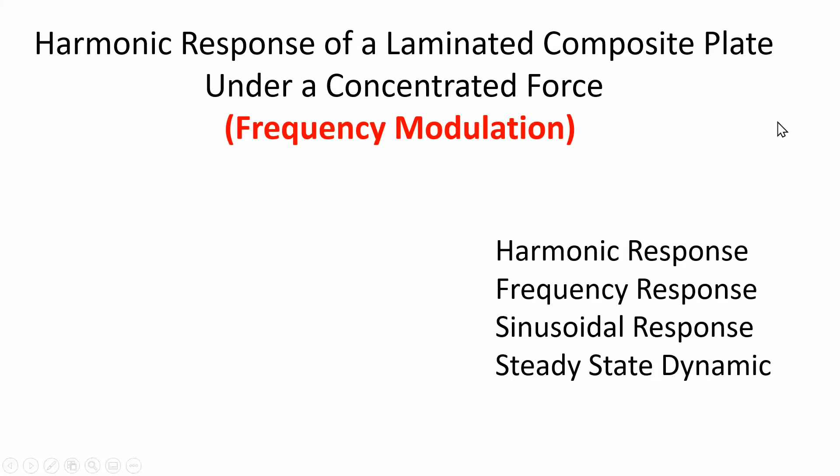We're going to apply our problem or the loading to a geometry of this type: a symmetric laminate plus or minus 45 degrees, with dimensions given in a minute. It is symmetrically located about that reference axis.

The source of a problem like that is, for example, if you took a table fan or a rotating machine, could be a pump or a compressor, etc., and put it at the middle of this plate. We know that due to imperfections in manufacturing, there is probably an imbalance with this rotating machine or fan, and as it turns, it causes a centrifugal force, which is applied at the center in an up and down direction.

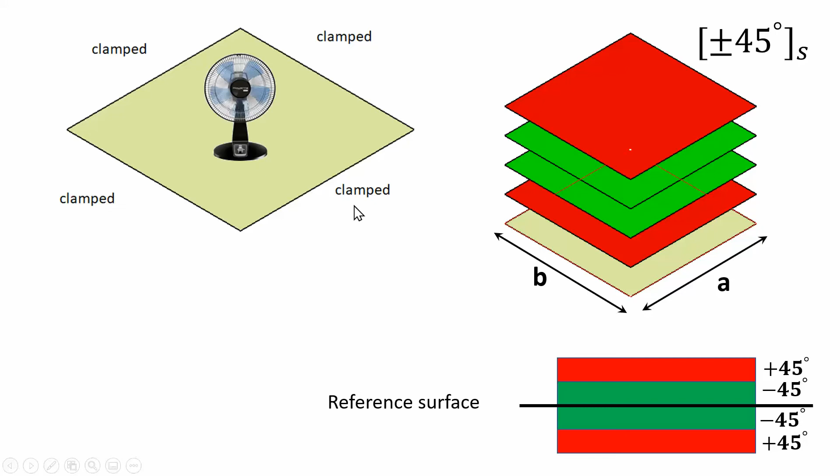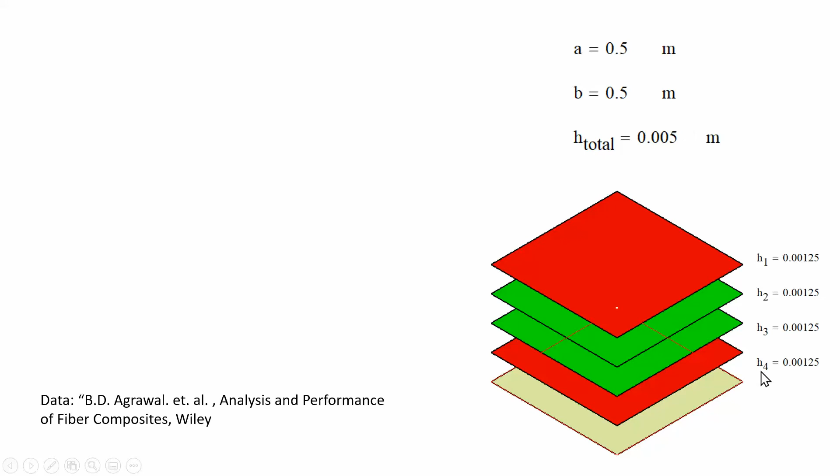By the way, I've drawn my rosette along with the global coordinate system to make it easier to see. This geometry and the data I'm using are taken from that book, and in fact I did a video segment on applying a static load to this problem. The geometry is a 50 centimeter by 50 centimeter composite plate, with four layers and a total thickness of 5 millimeters, and the properties are given here. I also need the density because it's a dynamic problem, so we put it there.

In general, this amplitude can depend on frequency. If it's like the previous video segment, it was constant, and for a constant amplitude, irrespective of frequency, we can use a white noise modulation type like we discussed in the earlier one. But if it depends on omega, on the frequency, then we have to provide CATIA with our own modulation, in the form of an Excel spreadsheet or a text file.

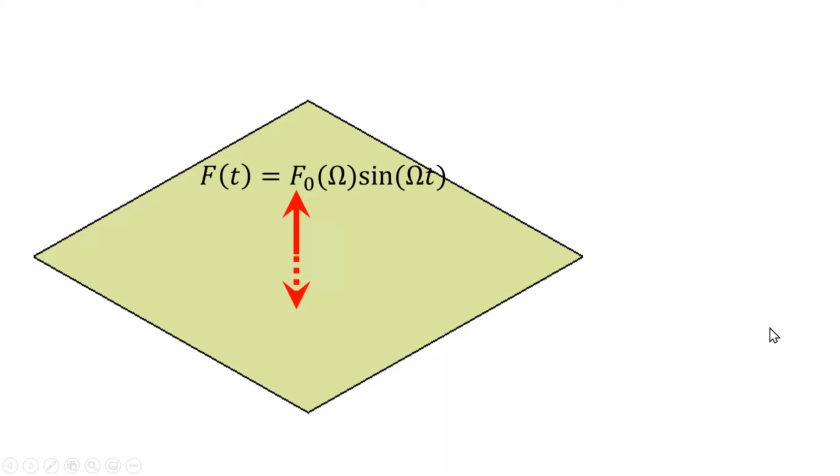So here's my fan. I'm going to be investigating the rotation of this fan, the RPM, or actually converted to hertz, between 100 hertz and 300 hertz. This may not be a realistic range, it's close to it, but anyway, we'll consider that.

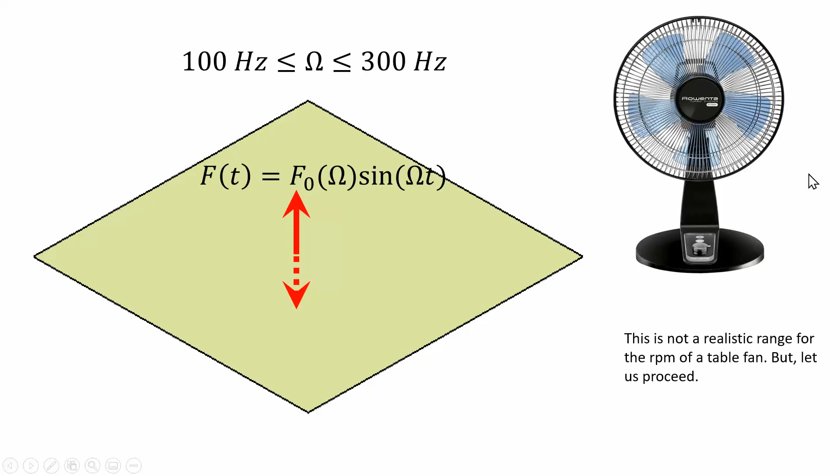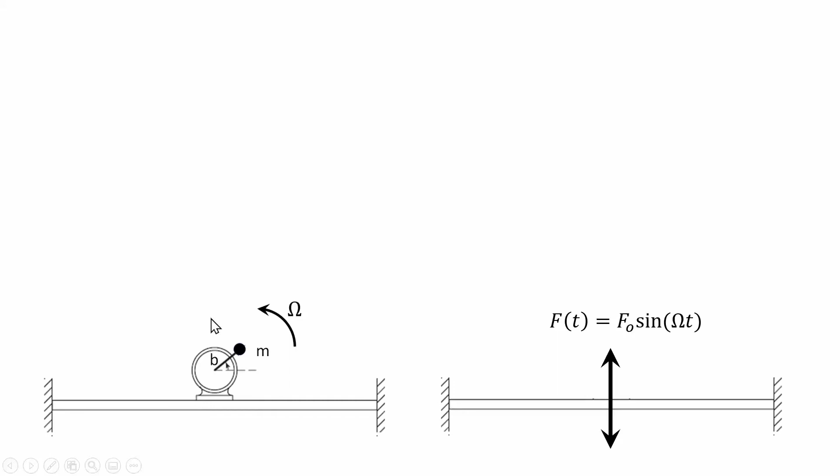In your vibrations course, you may have seen this in the context of a diagram like that: a rotating machine up there which has a mass imbalance placed at a distance, which can be assumed to be B units away from the rotation center. As it turns, it creates a centrifugal force, and that causes this thing to vibrate up or down. It can also go sideways, but vibration up and down is the critical one.

The magnitude of that concentrated force is actually mass times r omega squared, with r being b here, so mb. The mb I'm going to use assumes a 10 gram mass at a distance of 2 centimeters away from the center of rotation. If you do mb omega squared, converting to hertz where omega is 2 pi f, and taking the 2 pi out, it comes to 0.0079 f squared, where f is the frequency in hertz. I'm going to use this number, ignoring the f squared, as the applied load in the static situation.

And then we remember that when you do these dynamic problems, you have to do the static case.

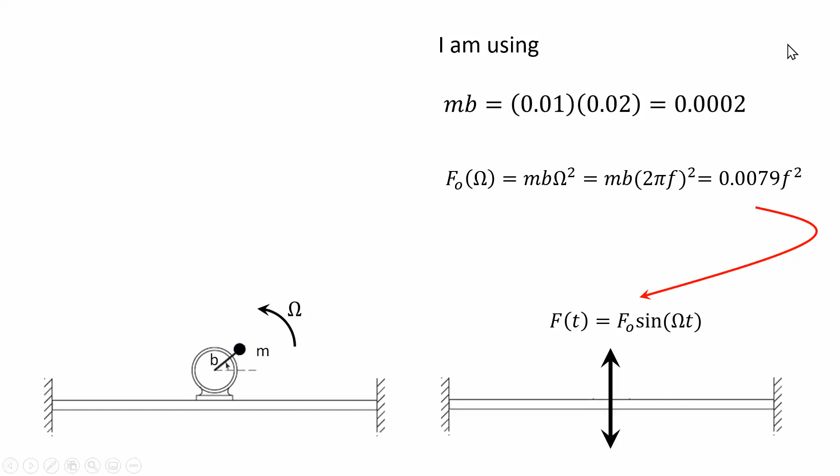I have done it by doing static first and then inserting or extracting frequencies of vibration, natural modes of the structure, and then we insert dynamic, harmonic, transient dynamic analysis. Which we're going to do. So the way my modulation is going to be is a curve like that. This is an Excel spreadsheet I'm going to prepare.

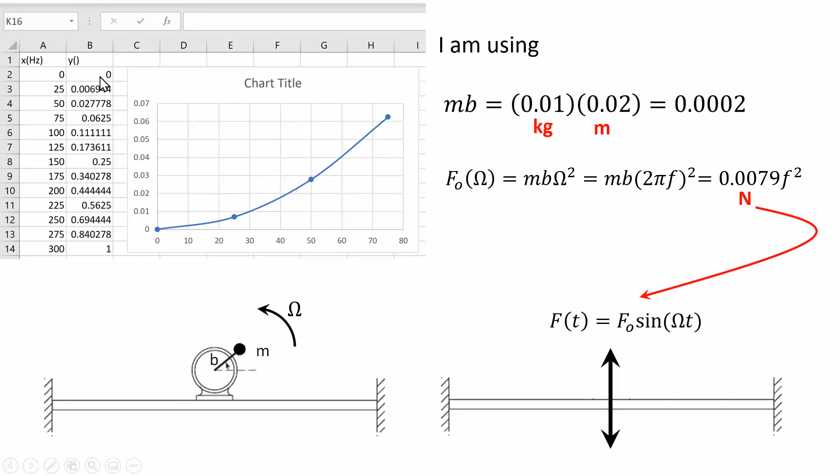Although I have it already, I'm going to prepare it from scratch for you. So it goes between 0 and 300 hertz, and somehow stops there. And the height goes from 0 to magnitude of 1, or amplitude of 1.

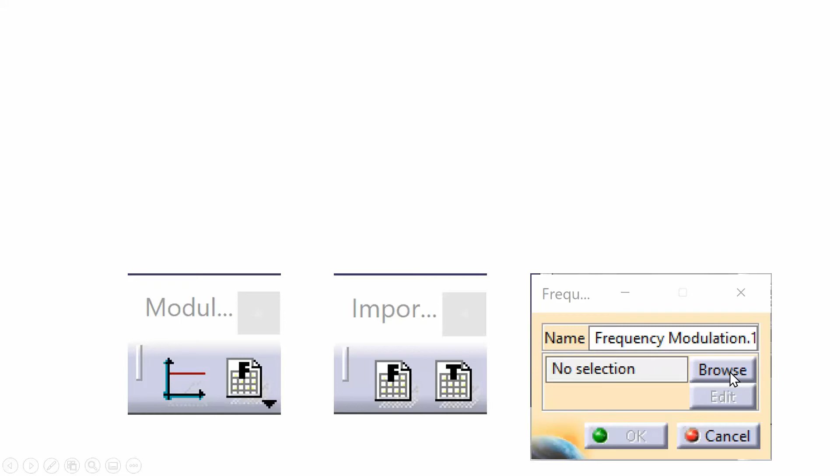This is how you do that when you have to import frequency modulation. You go to the modulation toolbar, make sure you select the frequency icon here, and then it asks you to go and get your Excel spreadsheet. Now this is the modulation curve that I'm going to be creating, goes from 0 to 300, and height goes from 0 to 1.

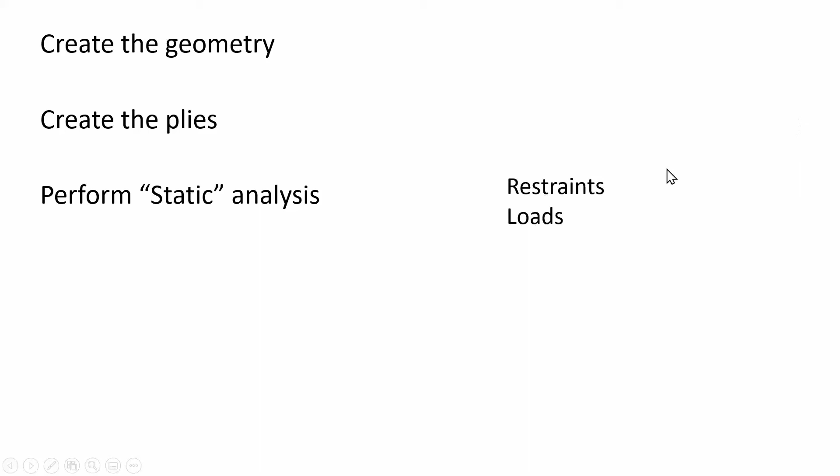Now let me remind you what the steps are. You create the geometry, you create the plies, you do a static analysis. When doing static analysis, you put restraints on the edges of the plate and apply load at the center, and you run it. Then you insert a frequency case, and that will extract the natural frequencies of the structure based on the restraints that you put in there.

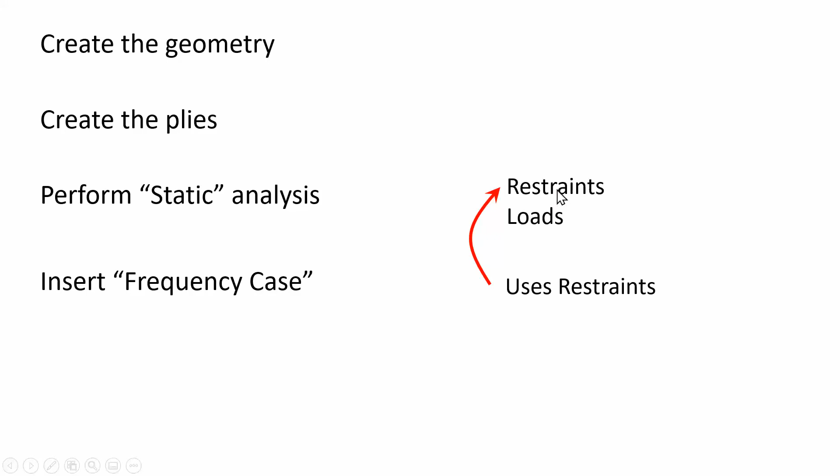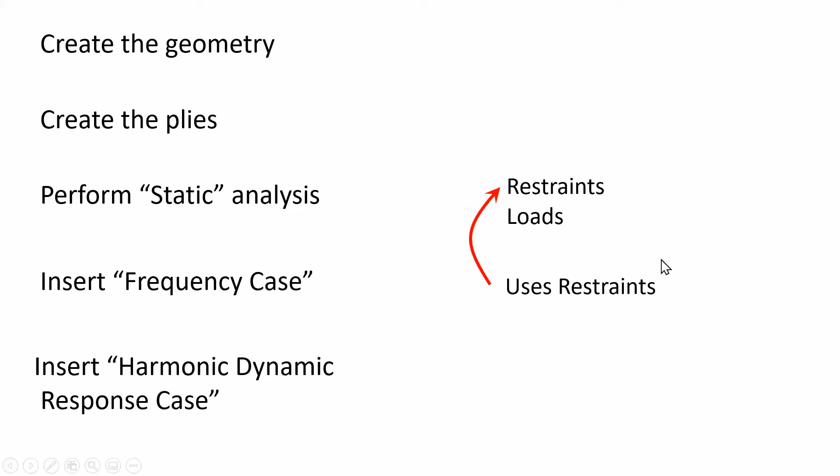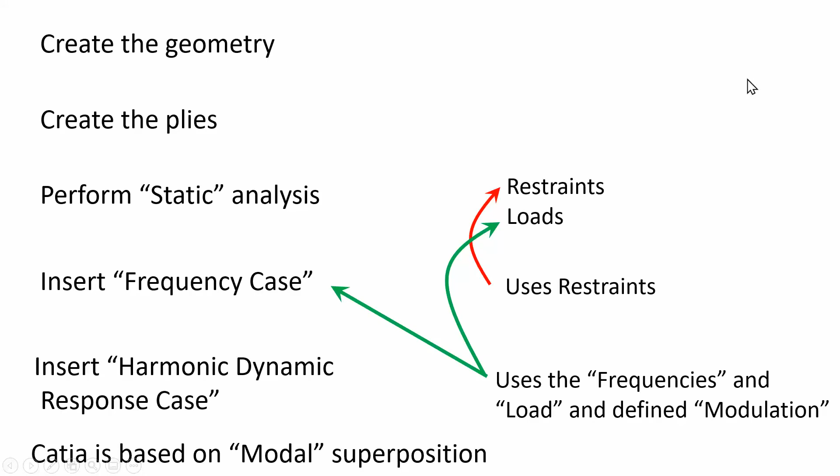It has nothing to do with load. Then you insert a harmonic dynamic response case, and that uses the frequencies that you calculated and the excitation or modulation that you provided based on that load. This step uses the frequencies here and the load that you already put in static, plus the modulation that you're going to submit as an Excel spreadsheet. CATIA's time-dependent or frequency-dependent problem is based on modal superposition, therefore you cannot do nonlinear problems with it. Okay, so let's go ahead and do this.

I'm going to do everything from scratch for you, although that means there will be repetition, because we've created this structure three times in previous videos. If you feel comfortable with it and know how to do the material properties, just fast forward the video and move on to the stuff you don't know. Okay, let me go ahead and go to CATIA.

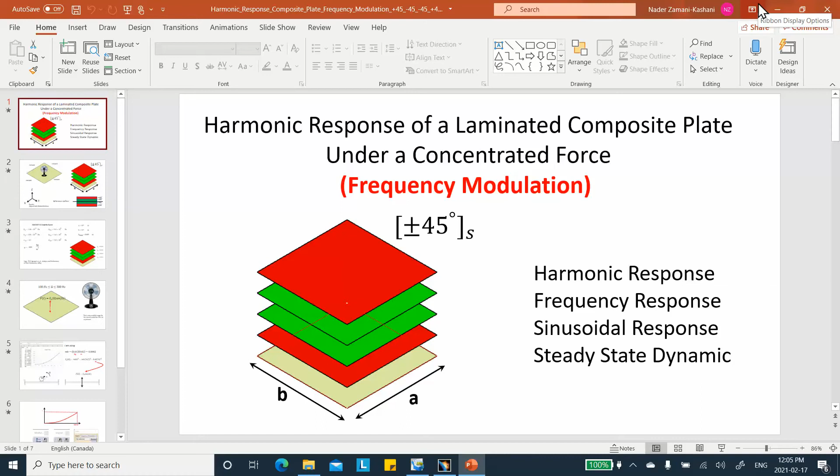Move this thing down. Go to CATIA. Let's do the material first. So we go to Start, Infrastructure, and Material. This is a new one that we're going to create.

I double click on this and give it a meaningful name that I can recognize. I'll call it rotating fan. How about that, rotating fan? Apply. You can see the name... oops, what I did. Let me try it again. Rotating fan. Apply. See the name change here.

And then you go to composites. The thickness of each one of those layers is 4 plies, 0.125 centimeter, and it's unidirectional, although these are totally irrelevant for us. We just need this number, 0.125.

And then we're going to go to analysis, and it's 2D orthotropic, since we are doing plies in that context. The numbers were: the first one was 1.48 e to the 11. The next one, transverse direction, is 1.05 e to the 10 Pascal. Poisson ratio is 0.3.

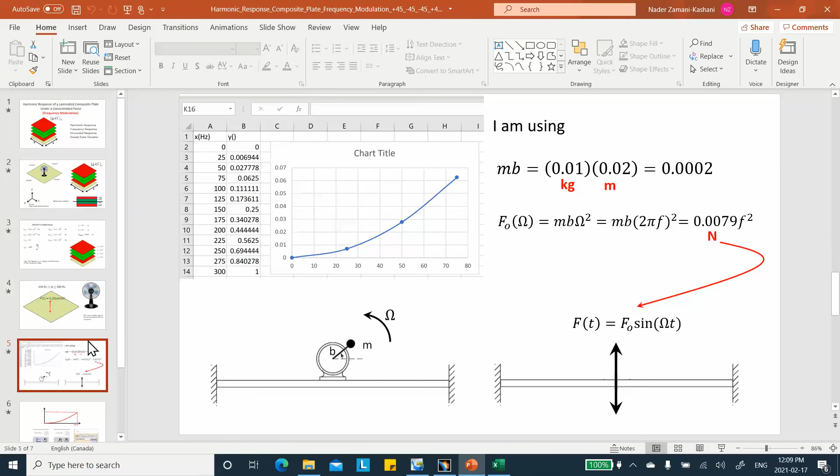Let's do it every... the data I'm going to give it every maybe 20. Can't remember what they have here. I'm doing it every 25 hertz. Okay, so 25.

These two I'm going to select and drag until I reach 300. This is equal to this Excel formula you probably know, equal to parentheses, this guy divided by the maximum frequency in hertz that I'm specifying here, to the power of 2. Then I'm going to take this and drag it down here. Of course, when it reaches down there, it's going to be 1.

I'm going to save this thing, file, save management. Where would that be? On the desktop, rotating fan. I'm going to... did it live, how about that? Did it live.

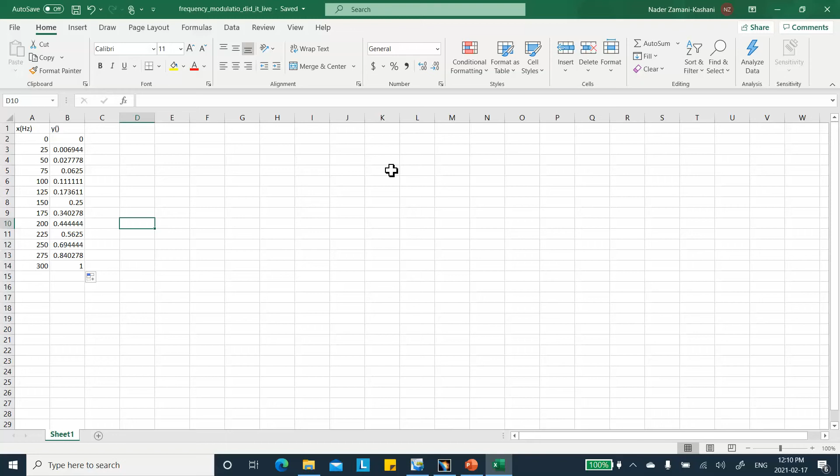Okay, say okay. And if I plot this, I will get that sketch that I showed you. We close that. Now we're going to do the geometry.

So file, new, a part file. I'm going to call it rotating fan. Rotating fan.

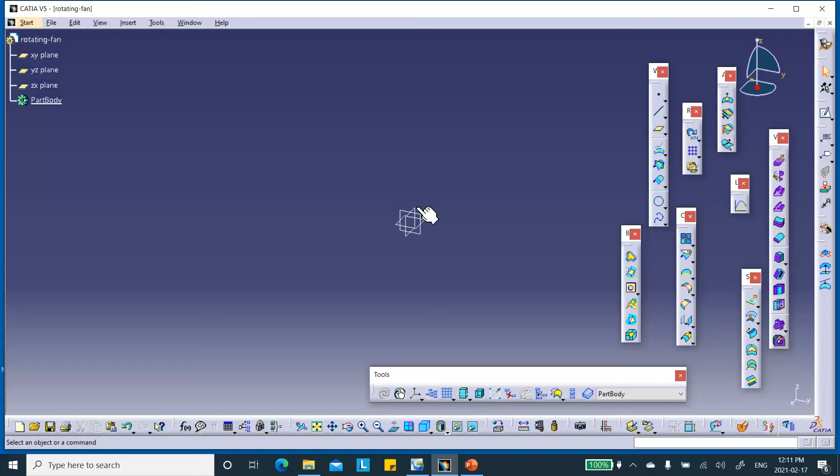Very simple rectangle. So you see, in generative shape design, on that plane, I'm going to sketch a rectangle which is 50 centimeters by 50 centimeters. So this is 50, and this is 50.

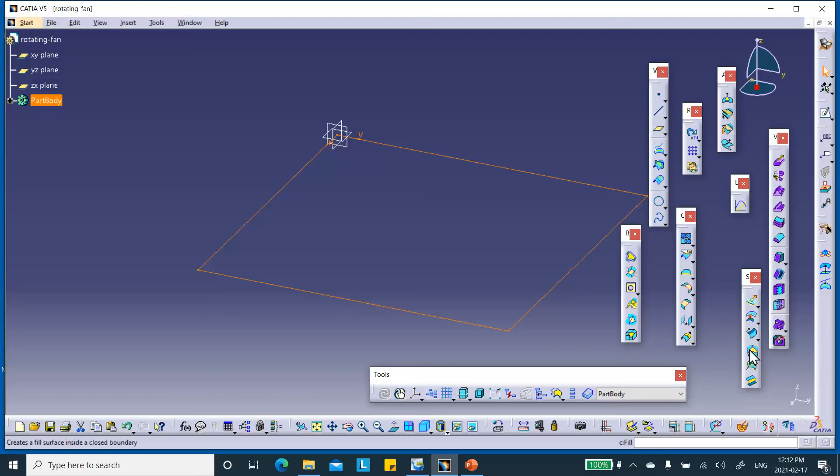Exit. Now fill this, FILL right here, and join it. I'm going to double click on this thing. My habit is always to have the joining direction down in a problem like this.

Okay, let's save this thing. File, save management. This was the file name, save as, folder rotating fan. Okay, very good.

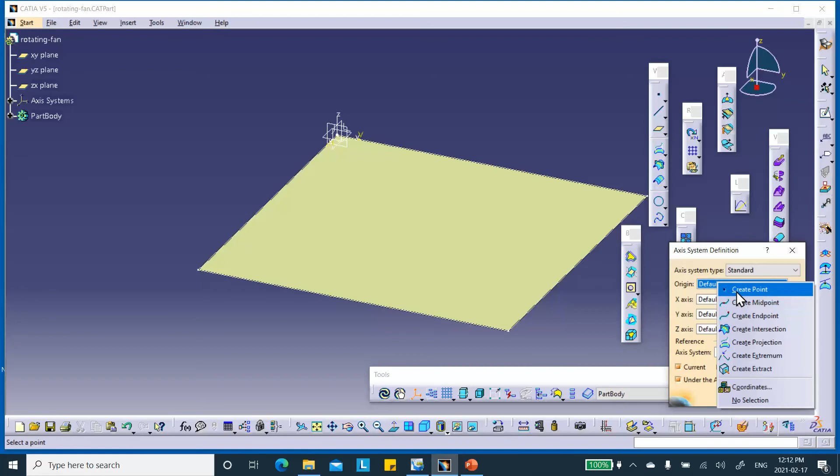Let's create our axis system. This is going to be used as a rosette, and I'm going to move it. The default is over here. I'm going to move it a little bit to the right so I can see it. You put the cursor on the origin line, create a point, give it a coordinate, for example Y of minus 20 centimeters, and say preview. So it's going to put it right there, and we say OK, and make sure this is unchecked. So the coordinate system is not going to be used until I need it.

Okay, good. So now we're going to go to our composite design. All these steps were done in the previous 2-3 videos. So if you know these things, please fast forward.

Composite parameters, apply, add material. Let's go to that folder, get the thing that I created for you. Rotating fan, right there, and this is the one that I created. And we say OK, right here.

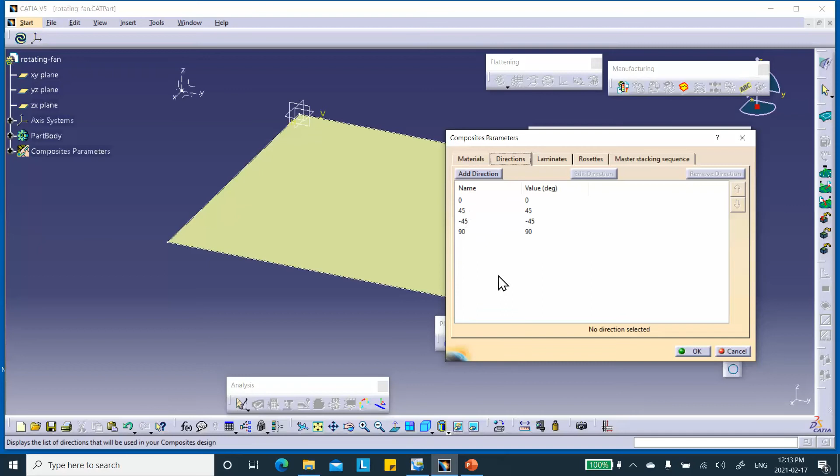For direction, we have 45 and minus 45. I don't need to create anything already. Add a rosette, and the rosette is going to be this fellow. So the angles that we specify are going to be with respect to the X of this rosette coordinate system. Okay, so save everything.

Let's create our ply group right there, ply group, and the surface is right there. Draping direction, I always like up, and we say OK.

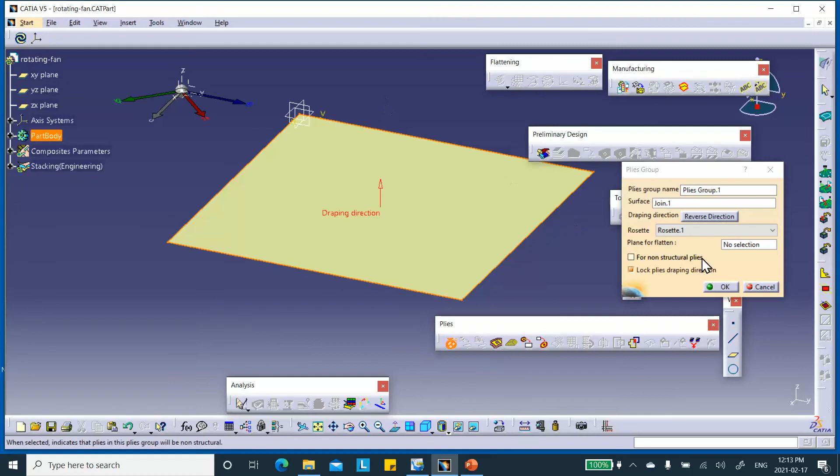Now we're going to do the first two plies, and then use symmetry in order to reflect it and avoid doing extra work. So here's a click on this manual ply on that group. The boundary is this, okay, that sketch, and the attribute, the top one, is 45. That's ply number 1. Material is already correctly picked, so you can see that the ply has been created.

Repeat this again for the next ply. So in that group, the boundary is still the same thing. Attribute, the next one is minus 45. Okay, and you can look at this at this point. Although we're not done, we need 2 more plies.

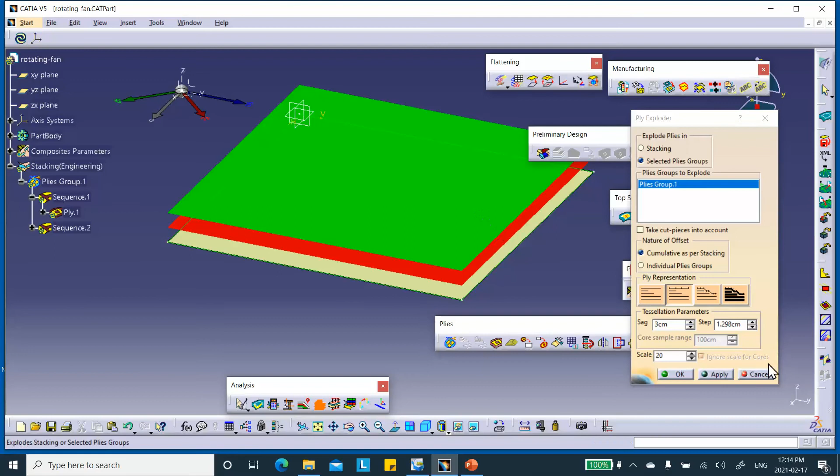Cancel that. So I'm going to use this icon here in the plies toolbar, this icon which says symmetric ply stacking. You select it. It says what is the group. There is my group, and it's a non-pivot.

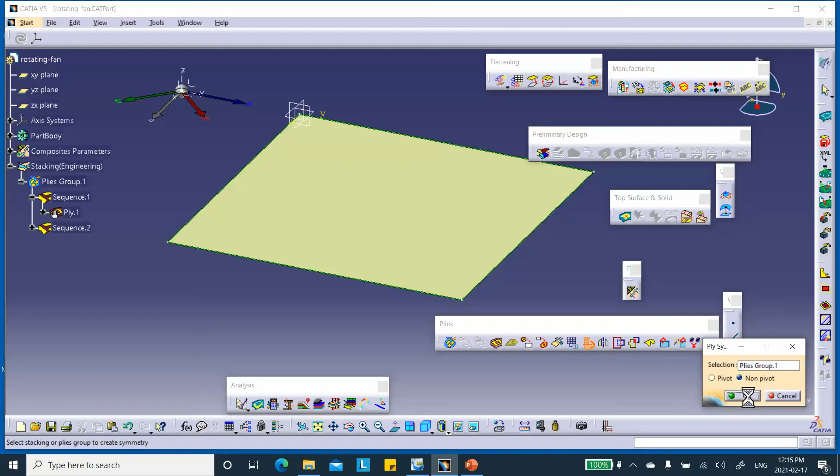Non-pivot means there's going to be 2 more below. That makes 4. If I do pivot, there's going to be 1 on top. The one in the middle is going to be maintained, and there's going to be 3 plies. The top one is going to get reflected down below. But I want 4 of them. Notice that, create 4, and now you can look at it.

It better be 45, yeah, minus 45. Yeah, we can see that there are 2 of them down there, and then 45. So we say cancel, and we're happy with this, and save everything.

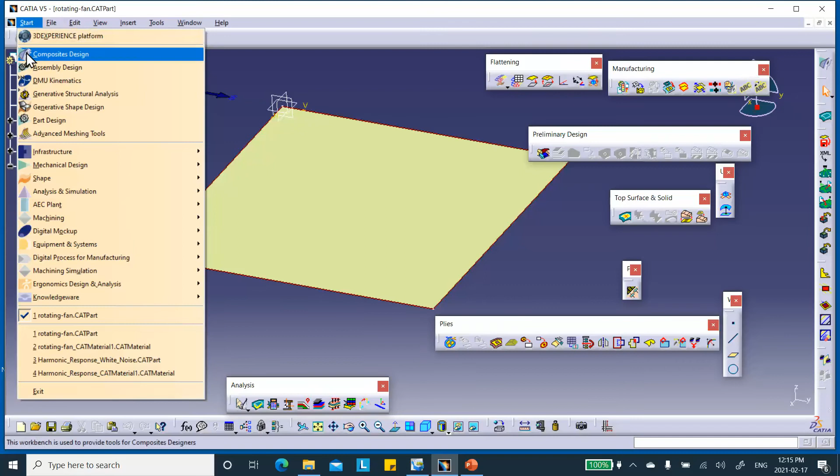All right, now we're going to go to advanced meshing tools. The reason I go there is I want to make sure my mesh is nice, quadrilateral type elements. If I'm happy with rectangular or triangular, I don't have to go there.

We started using this in the last video, and I told you this is something new because so far all the meshes I've created were using the surface mesher. But there's something called advanced surface mesher. There are things you can do here that you cannot do in the surface mesher.

For example, remember I created a point in the middle of this gadget. I want to make sure that point is a node of the mesh. I can't do it in surface mesher, you have to do it in advanced surface mesher. So you click on it.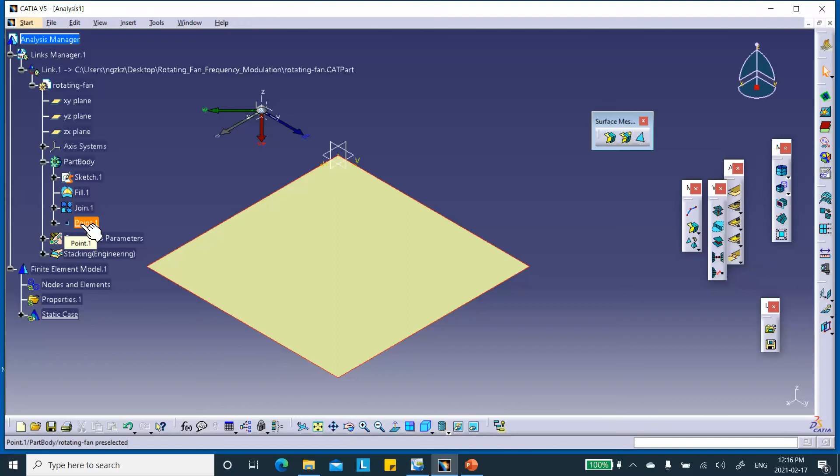Where is that node? Let me go ahead and get the node because I think it's hiding right now. Maybe I can't see it. Let me change the rendering here. Why is this thing not showing up? Let me see for a second. My node is that point I created. Oh no, you know what? I think I forgot to create my node at the center of this. I thought I did it, but I didn't.

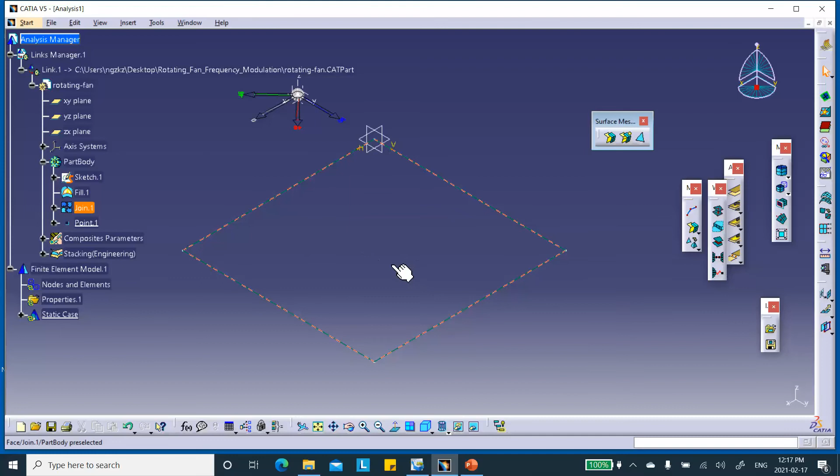So, okay, this is fine, there's nothing wrong with it. Let's go back to the part design and create a point.

You can create a point right here, and the coordinates are going to be 25 and 25. I think I forgot to do this. Okay, right there, this is the point I forgot. Now go back to advanced meshing tool.

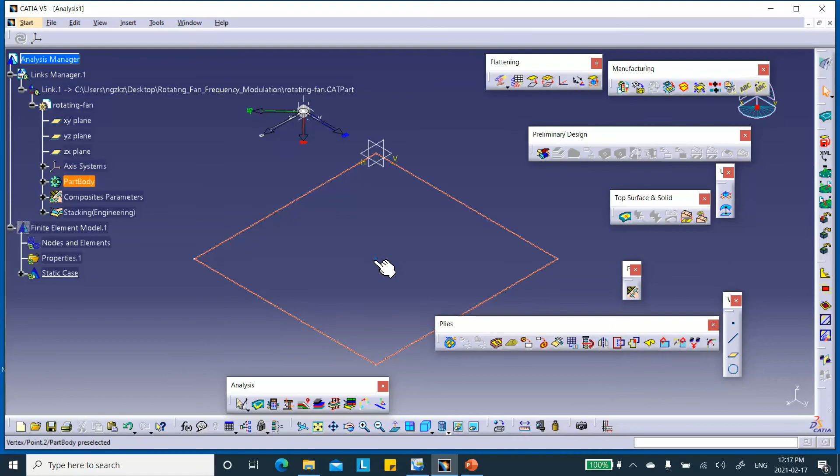So we go to the advanced surface mesher, not this one, advanced surface mesher, and it's asking for the geometry to be meshed, which is that join. Because I hid it by choosing a different rendering, I can't see it, but right there. So this is my surface.

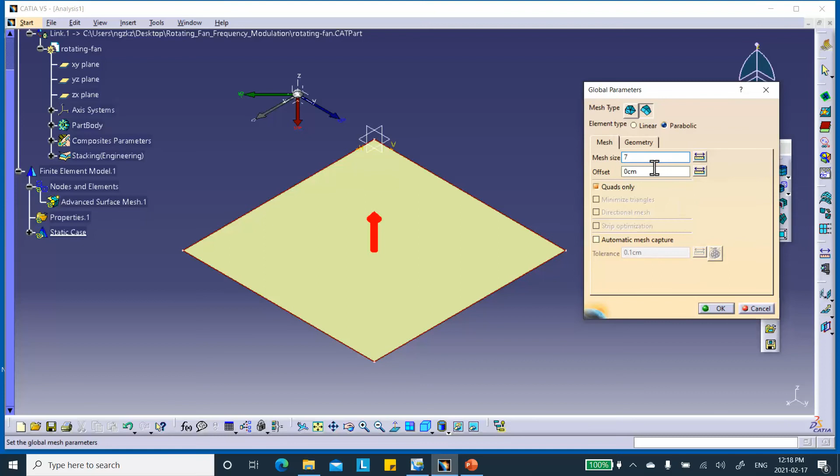Now on purpose, I'm going to put a 7 here, and then I'm going to come back and change it to 5 to show you what the effect is. Parabolic element, quads only, we say okay.

Now there's something we never used before except in the last video when I did the same kind of trick. It's this thing, add, remove, constraint. So I click on this. Notice you don't have this if you do it with the surface mesher, you only get it with the advanced surface mesher.

Now select the points tab, and then go select this point that you created right there. Say okay, and now you mesh it right there. This is the mesh, same as before.

Look at what happened, it tried to do all quadrilateral but couldn't. So it created a mesh like that, but that point I created is still a node of that mesh. Now we exit this.

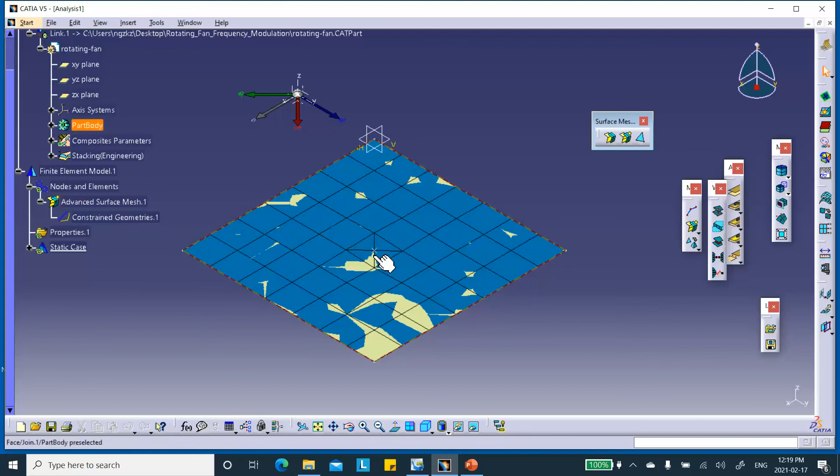But you know, I can go ahead, remember this was based on 7 centimeters that I inputted. So let's go back here and change this to 5. Okay, say fine. It says invalidate the geometry simplification, that's fine, I have no problem. Mesh it, and there we are.

So stuff like this you cannot do, or at least I'm positive you cannot do it in the surface mesher. You have to do it in an advanced surface mesher. Okay, so we say fine.

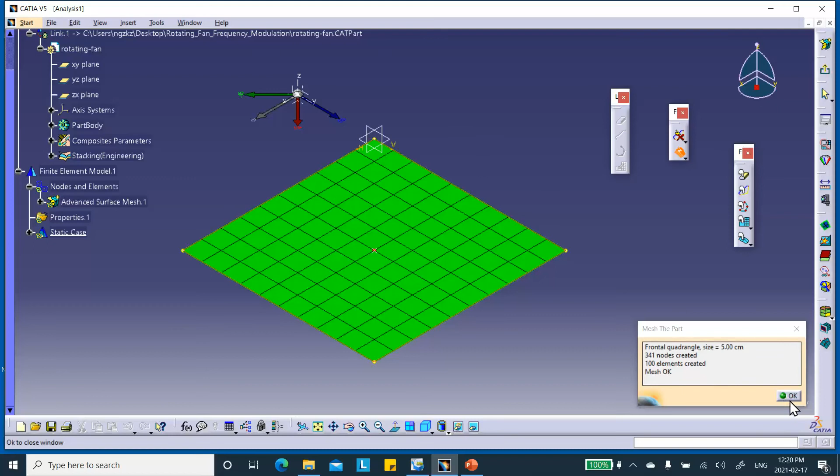Incidentally, the way you do this if you don't use a surface mesher, if you use the regular triangular mesh, is slightly different. If you see some other videos unrelated to composites on the finite element playlist, you'll see what I've done, how to make sure a particular point is a node with a regular triangular mesh. But that's okay, so we exit.

All right, so let's save our analysis file. File, save management, there was my analysis file. Save as, this is the right folder. I'll call it rotating fan. Rotating fan. Okay.

And we're done here. So we're going to go to generative structural analysis. This is where we apply the loads and the restraints and things like that. First, let me hide this rosette, and I'm going to hide my stacking display branch and my sketch. The reason is that if these are showing up, I won't be able to put restraints on these edges because I'm picking the sketch or the boundaries of the plies.

Okay, so first let's clamp these edges. 1, 2, 3, 4. All right, and we're going to put a force here, and this is going to get transferred to the node later on.

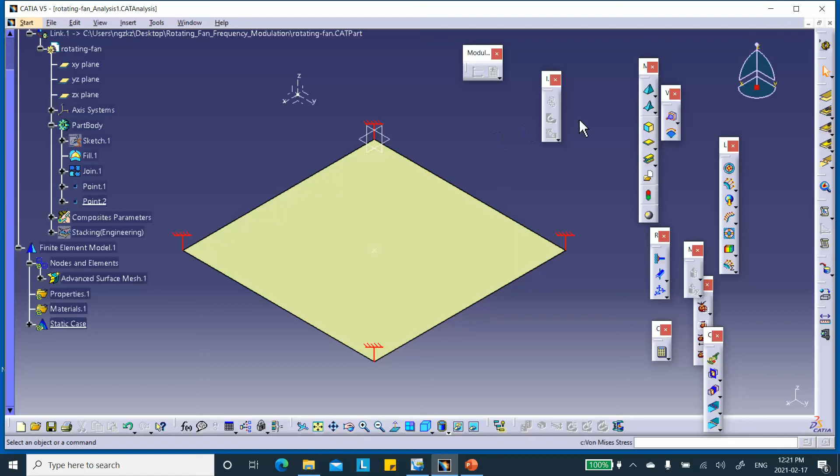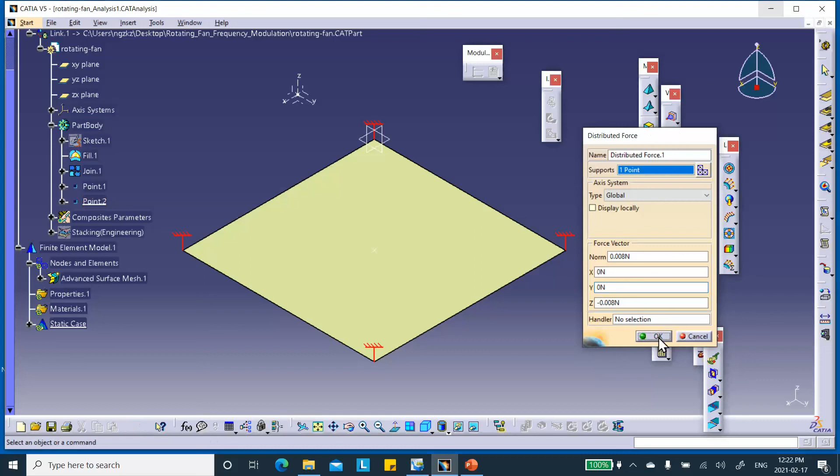So where is the distributed force? Right there, distributed force. You put it on that, and the magnitude of it is negative... let me see what I said I was going to put on it. Right here, 0.79, not 97, 79. That's right, minus 0.0079, and we say that's fine. Okay, it is there, you cannot see it, but it's down below right there. See, this has the same effect.

All right, good, we save this. Let's import our composite properties.

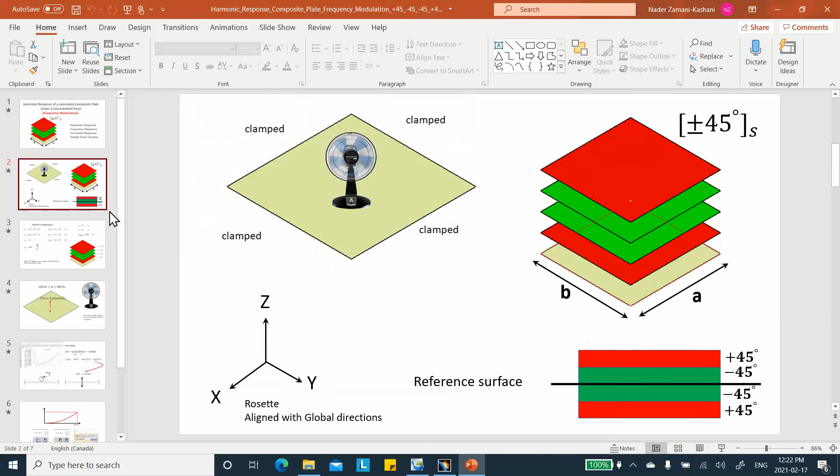The surface is right there, the support is right there, and we are doing it by ply. So you click on the wrench, you go and select your ply group right there, and we say OK, and it's symmetrically placed about the reference surface. We remind you what that means, like that, symmetrically placed there, and we say OK.

Now I can run this thing. By the way, notice that when I was doing all of these, the first time I went to the advanced surface mesh, it asked me whether I wanted to do static or dynamic, etc. I didn't change it, I left it as static. This is why right now we have a static case here. We applied our load and everything.

We're going to run it. Nothing exciting is going to happen. This is going to bend down, assuming that we haven't forgotten anything. There, yeah, look at the deflection. Obviously, it's going to go down.

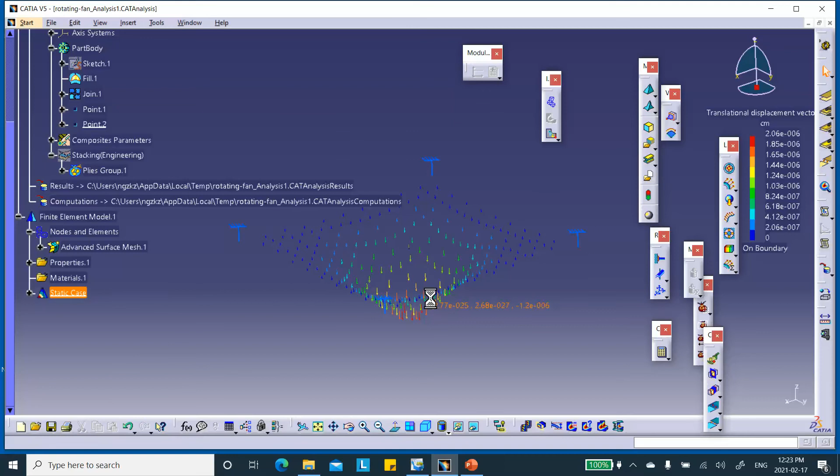Of course, you can clean this up, do it the way you want. I double clicked it, used average ISO, and you can choose different rendering, material shading, so that it looks nice in color. Okay, fine, so let me deactivate this.

Deactivate. All right, now what was the next step? So when you go here, we created the geometry, we created the ply, we did the static analysis, and now we're going to insert the frequency case. So we go up here, insert frequency case, right there.

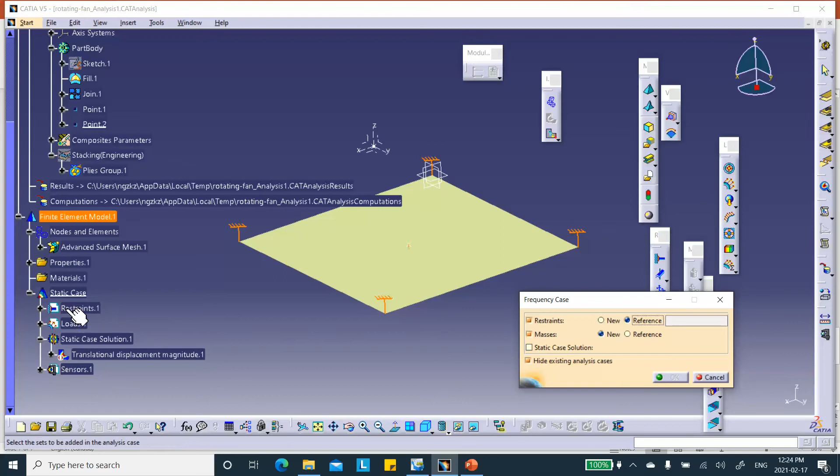It says, do you want to create your restraints as new ones, or do you already have restraints you can use? Well, I already have ones I can use, and I go to the static one that I did here, right there, and it uses those restraints. That's it, nothing else you need to do, just run it.

This will extract 10 frequencies, and the reason it does 10 frequencies is because the default is 10. If you double click on this guy, notice it says 10 modes. You want to change it if you want to play with some of those options there, that's up to you.

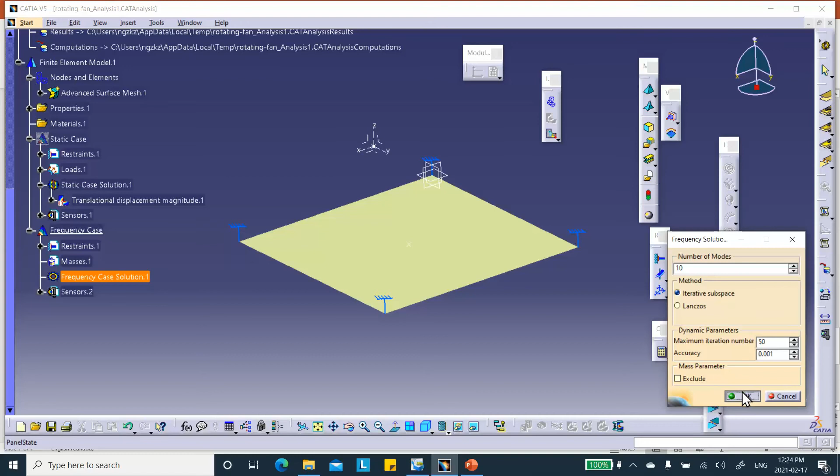Now let's look at the deflection mode. So you click on the translation, double click, and these are the 10 modes that were extracted. So this is the first mode, here's the second mode, third mode, fourth mode, etc., all the way to the 10th mode. Cancel, put it back there. Cancel. Now, what is the next step?

The next step is insert harmonic dynamic response case. Now remember, I created this Excel spreadsheet and I haven't used it yet. We will. So you go insert.

We did the transient in the previous videos, I believe 26 and 27, or 27 and 28. Let me make sure that I know what we have done. Okay, just bear with me for a second. The transient one was done in videos 26 and 27. I'm sure, yes, 26 and 27.

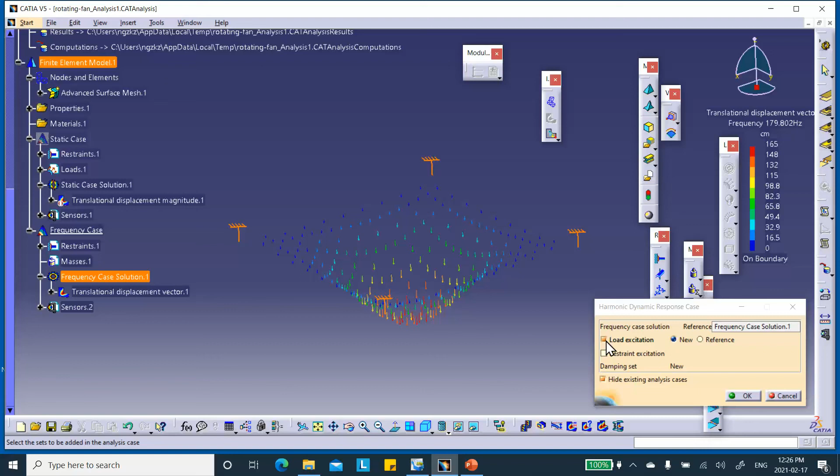So, insert the harmonic dynamic response. Okay, it says you extracted modes, do you want to use it? Well, the answer is yes, right there, you have to use it, you have no choice. But the load, do you already have it, or do you want to use a new one? Well, we're going to use a new one. Okay, fine, let me deactivate this plot for you.

I'm going to check something for you because video number 28 was this problem, except that the amplitude was constant, independent of the frequency. So now we're going to do it as a function of frequency.

Okay, good, so here we are. First of all, if you double click on load excitation, it asks what about your load. Well, that's no problem, I can go and select this load. In the static case, remember I put a 0.0079 downward? Okay, I can do that.

The only problem is, where's your modulation? If the load was constant as a function of frequency, I can go and create a white noise and use it. But this is not constant, we know that, so I cancel that.

We go here to the modulation. This is white noise, this is frequency modulation. The other one is time, but we don't have a time problem. You click on it, it says where is it? Well, browse, remember I created that frequency modulation? We did it live together. We say OK, and then we say OK.

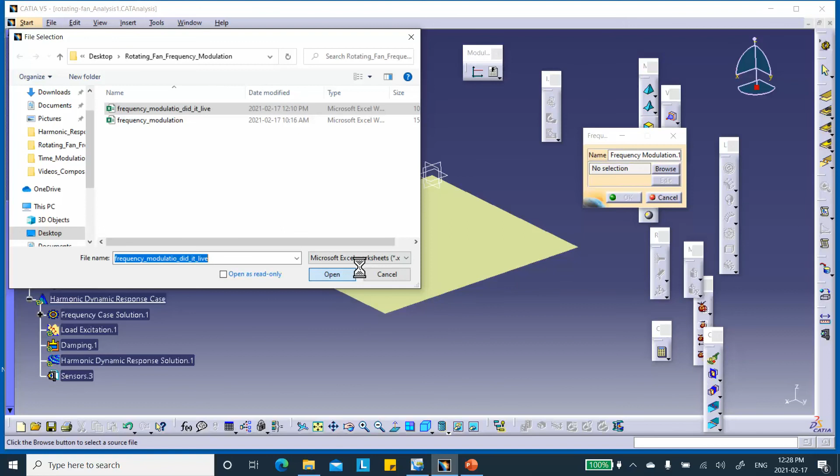So it creates it for you in the tree. If you look carefully, you see it's somewhere here, right there, under modulation. And in fact, we can plot it to make sure it's right. So put the cursor there, right click, put it on the modulation, right click, and then generate 2D plot. This better give me that parabola, and it does.

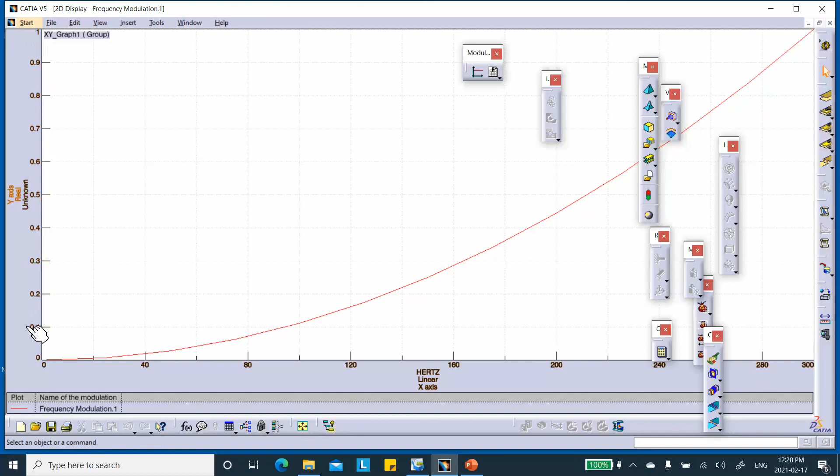Notice it goes from 0 to 300, and the amplitude goes between 0 and 1. So we close that, don't need it.

All right, so now I go double click on the load. For the load, I go and select it from the static case that I did, remember that concentrated downward load? And for the modulation, we go and select the one that we created right there, we imported it, okay?

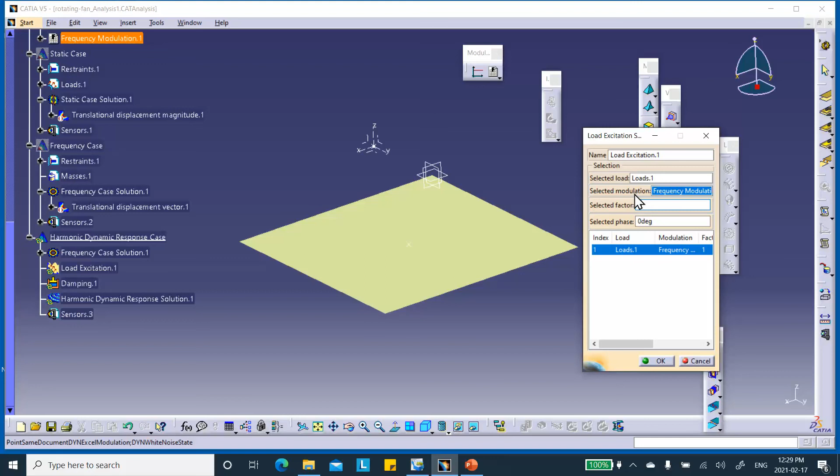We say fine. And this scale factor, what it means is don't scale up my modulation curve, okay? Just use it as I gave you.

Now, believe it or not, you don't have to run it. Everything you want is already available, because after all what you needed was the frequencies and the load and the curve. In the previous two videos I also said let's run it again, but you really don't have to do that. This is why this process is so efficient.

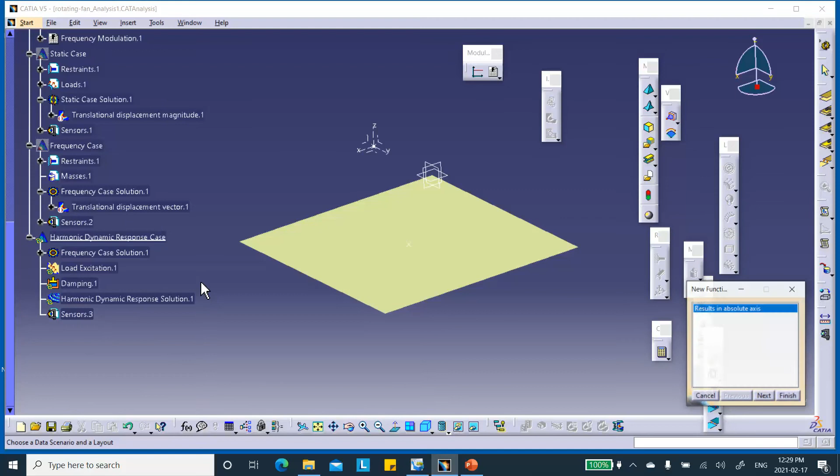So what we do is we go say fine, put the cursor there, right click, generate 2D display. Okay, yeah, we have done this 3 times already in the previous videos. Finish. It says go pick the node that you want to monitor and tell me what you want to plot about it.

For example, do you want to do displacement? Do you want to do velocity, acceleration? No, I want to do displacement. Okay, so you minimize this and go to your screen back there and try to pick that node.

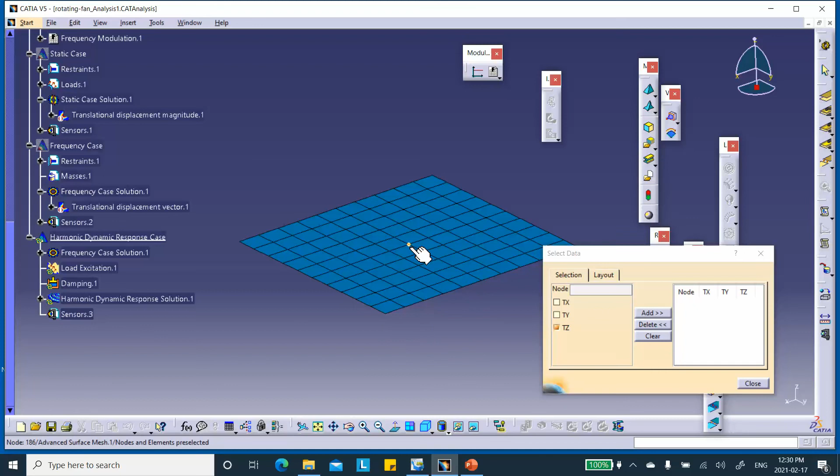Now, if you can't see it, there are different ways of doing it, you can change the rendering here. If you still don't know where it is, remember that point we created? If I say hide and show, it tells you exactly. Just don't show me the joint, but show me the point right there. It's right there. Okay, well, you could have done this by just counting these 5 and 5 in each direction.

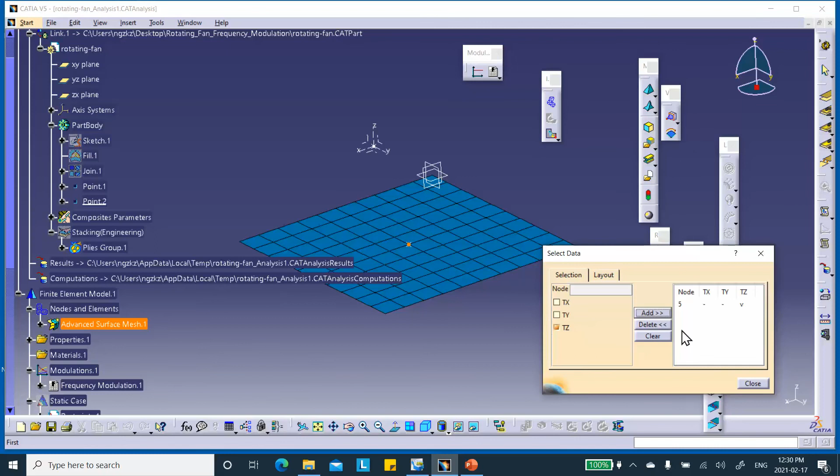Okay, add, and we can close that. So it did create it, it's right there. If I double click on it...

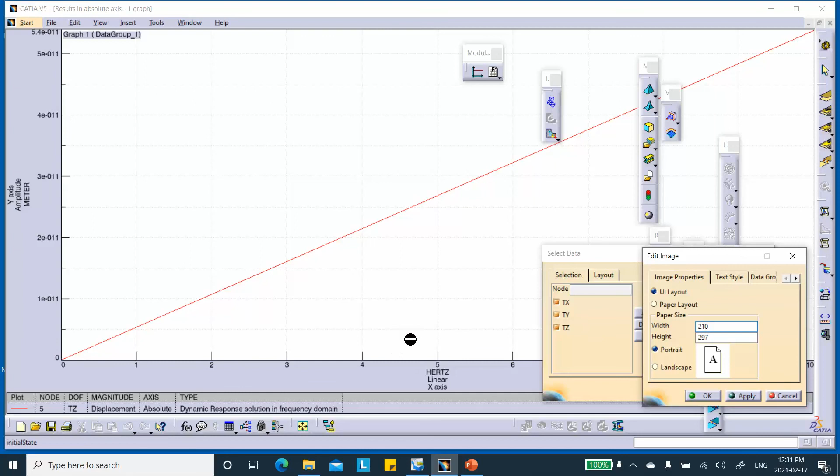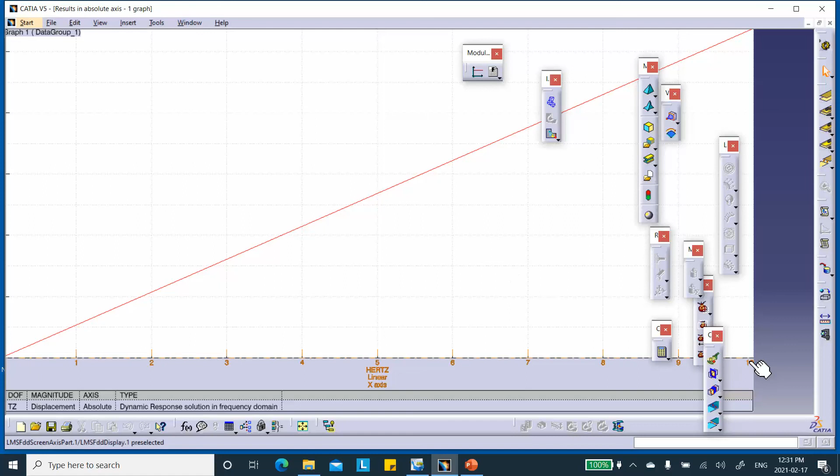And this is wrong. Hertz, maybe, actually let me zoom in. This is wrong, because this is supposed to be a parabola, right? Okay, but it didn't go all the way, it didn't go all the way to 300.

So let's make sure our data was correct. So let me go ahead. Things like this happen, we have to make sure. 300 hertz, okay, so this was good, no problem, okay so my data was correct. In fact, I plotted it, it came out to be okay.

And displacement node 5. Yeah, that looks good.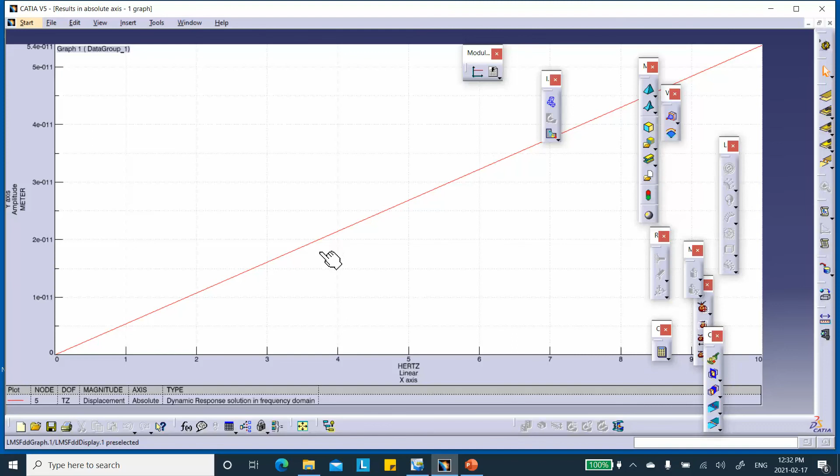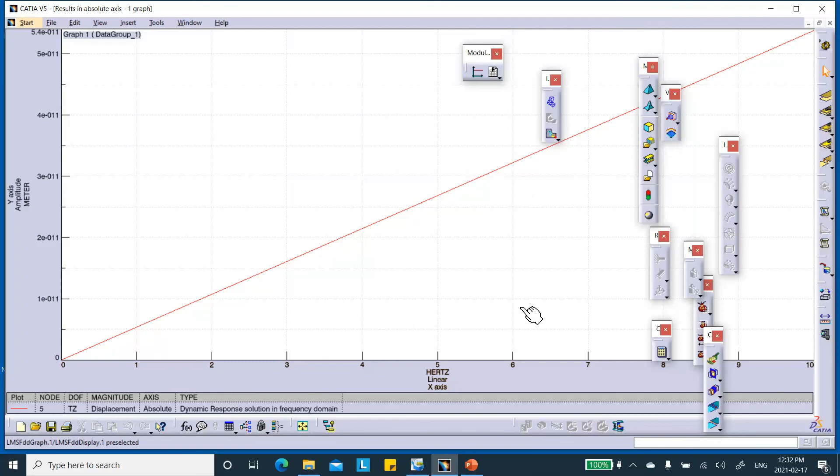That was node 5. Okay, let's go ahead and see. I have a feeling. Let me look for a second.

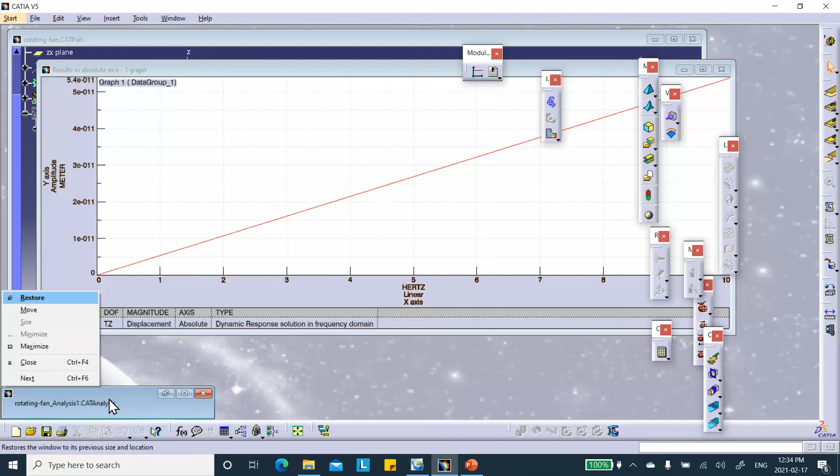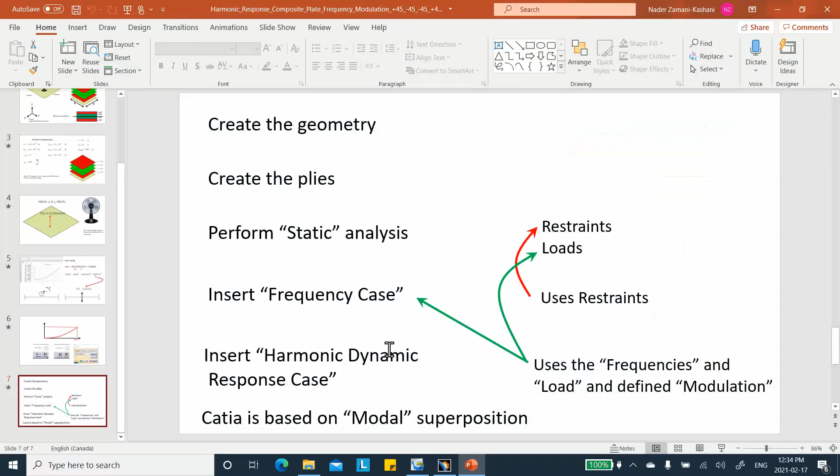All right, let me minimize this for a second. This didn't look right, and it goes between 0 and 10 hertz. The reason this happened is that when I was trying to do the analysis, it's very important. You see that if you double click on this, it tells you the range I wanted to sweep is between 0 and 10. So I don't want that. Remember this? I said I'm going to look at it in this range.

So what we want to do is go between 100 hertz and 300 hertz. There's nothing wrong with what I showed you, it's just that the range was so limited that it showed almost a straight line. Let's make this a thousand steps, or maybe 1,000, 100, 1,000 steps, how about that. You don't have to run it, just double click on this. And there we are.

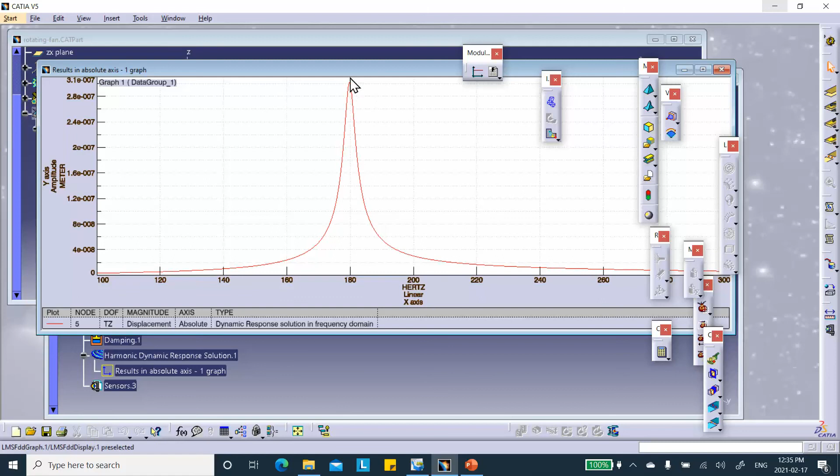So what happened is that you're sweeping the frequency of the fan, the rotation of the fan, between 100 hertz and 300 hertz. As you do that, when that frequency reaches the natural frequency, the first natural frequency of the plate, which is around 179, you get resonance. If you look at your model, you can check the frequencies again. The first frequency was 179, which is why when I get close to that I get a peak. Now, you did not get the other peaks because the next one was at basically 323.

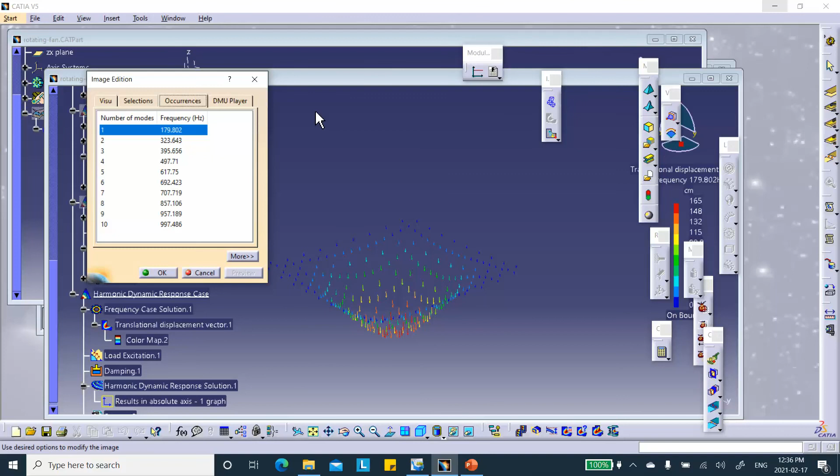So let's go ahead and increase the range. Let's see, where was this? Right there. So we go here, not there. We go to the harmonic dynamic response line, and let's go to about 1,000 hertz. That's not realistic, a fan does not turn at 1,000 hertz, but we can pretend that it does.

Let's go ahead, notice I'm not running it because everything is already there. Okay, there we are, these are the other frequencies. This was 180, and the reason you don't get a peak at 300 is because that 300 hertz was probably not a transverse vibration mode, it was probably in-plane or something along that line. These are the other peaks.

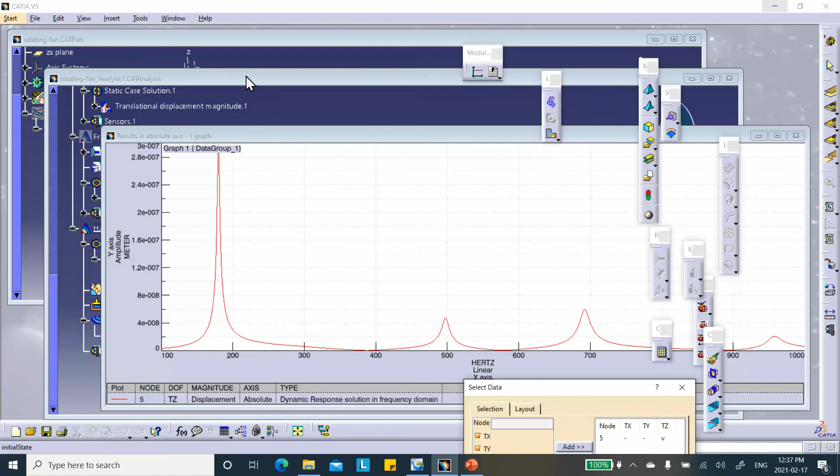The other thing you notice is that it looks like there is damping, because otherwise this should shoot to infinity, and the answer is yes, we talked about this in the previous video. By default, let me close this, when you go to damping it takes all the modes and puts 1% damping on it. So I put a 0 here if I don't want any damping. Now just go and look at your curve.

Okay, notice that it shoots to infinity. The other thing you can do, if you're interested, is that for each one of these frequencies, you can plot the shape of the deformed plate and plot the stresses.

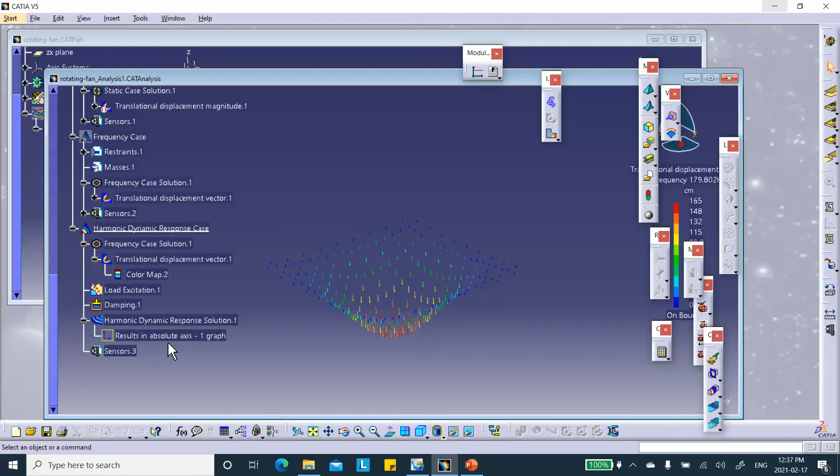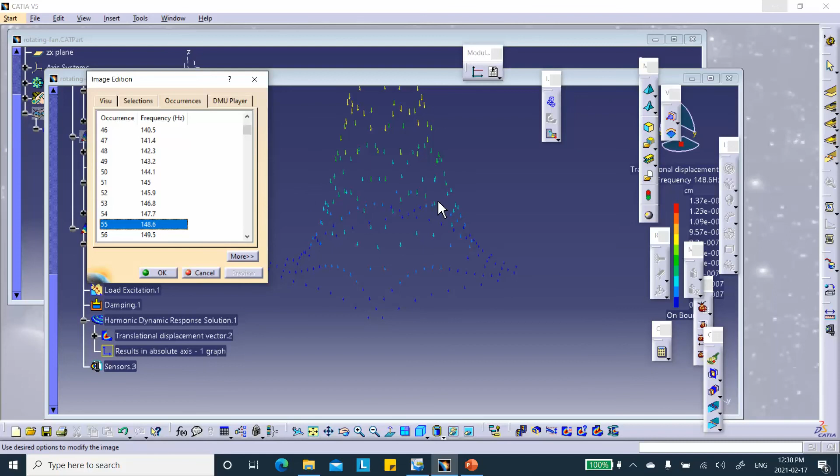So if you click on this displacement and double click on it, it tells you that you took the displacement at 180 hertz. If I go to some other frequency, you can look at the displacement there too.

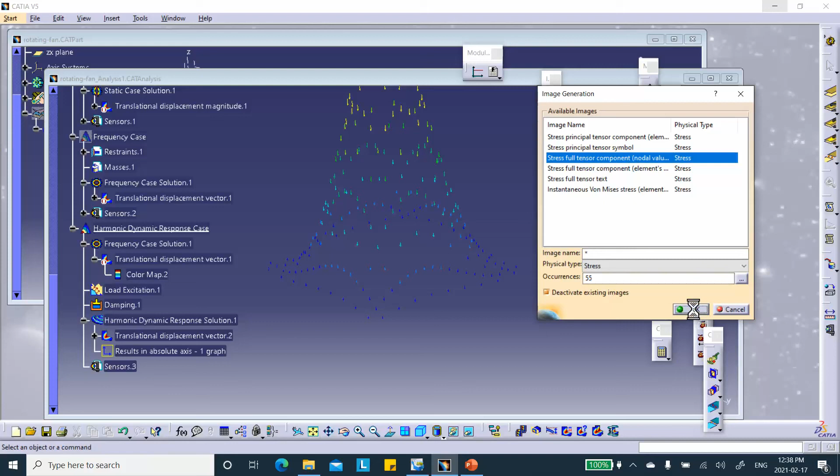If you want to look at the stresses, you put the cursor right there on harmonic dynamic, right click, generate image, the same process we've done in other videos in different contexts. Stress component, for example, we say okay, and if you want to know what you've plotted, you double click on this line which says stress tensor.

It says that you have plotted sigma x in the local direction, and this was translation, right? Yeah, okay. So what is this stress for lamina 1? You can go to the other laminas and find out how things look there.

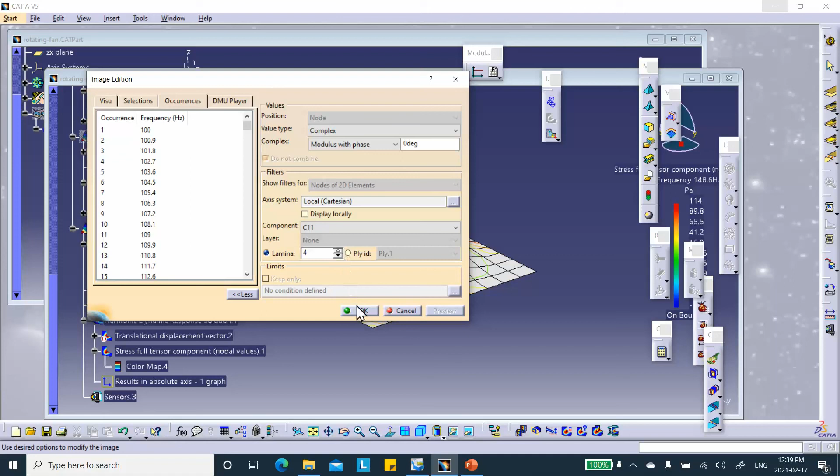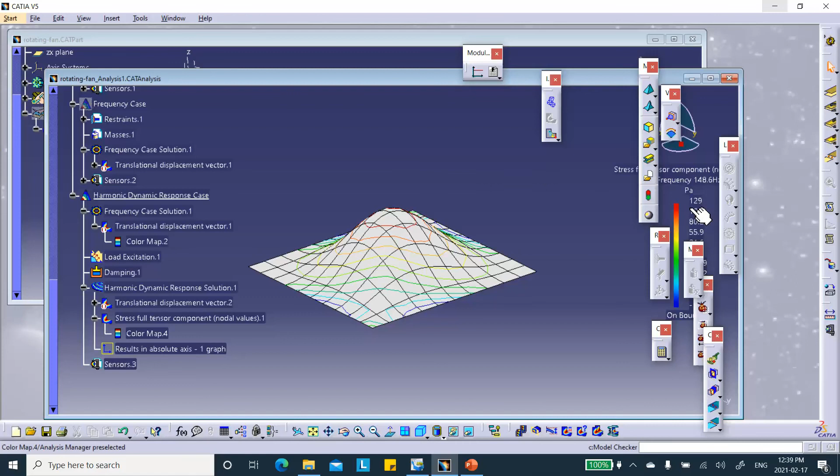So I hope this helped you understand the process for analyzing things like that. I do realize we are not checking things against experimental or theoretical results, but if you did have them, it's a good idea to go and find out what's going on. It's easy to generate good-looking graphs and colors that may all be garbage. So just because things look good on the screen doesn't necessarily mean they're right.